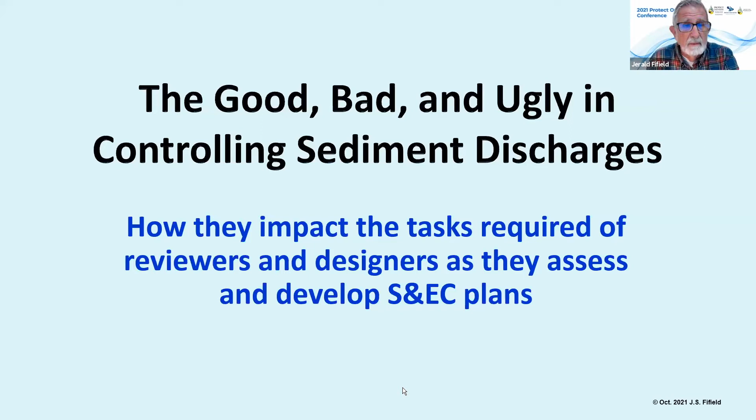The information I'm providing would benefit reviewers and designers of sediment erosion control plans the most, but the entire presentation will also benefit contractors as they implement what's necessary to meet the requirements of the federal construction general permit, as well as the Hawaii Health Department requirements. There are basic definitions we're going to be working with, and as we go through, you'll see an item come up on the lower left-hand part of your screen—it's a course that will be offered in February of next year for designers and reviewers.

The most important part right now is how do we minimize erosion? You cannot prevent erosion, and that's the first thing I want everybody to realize. But we can control or minimize sediment by minimizing erosion. Ironically, minimizing erosion during construction could very well be the least expensive part of this endeavor, because most of the time we are always trying to capture the sediment that's suspended in runoff waters, and that is what costs the most money.

As we go through, keep these three items in mind: sediment control, sedimentation—which is the process of capturing the particles suspended in water—and erosion control. Those are the big three we're going to be working with.

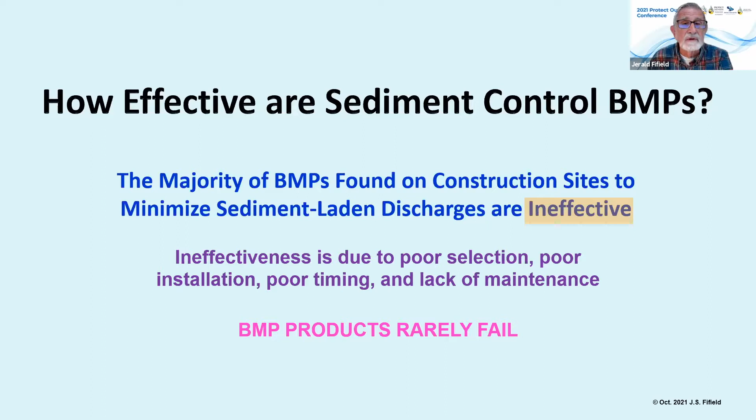One question I get asked all the time is, how effective are these sediment control BMPs? Well, not going to be good news. The majority of BMPs out there to minimize sediment-laden discharges are relatively ineffective. But it's not because of the product—it's usually due to poor selection, poor installation, poor timing, and probably the biggest one of them all, lack of maintenance. The products rarely fail. It's us that are putting them in, evaluating them, and doing inspections that have the problems. That's what this whole presentation is going to be about.

Let's go through a couple things commonly found in Hawaii. These are pictures I've acquired while doing work over in Hawaii. I'm going to give you a series of photographs, the name of them, and their intent. SC meaning sediment control, EC erosion control, WEC wind erosion control, and then there's the infamous none of the above.

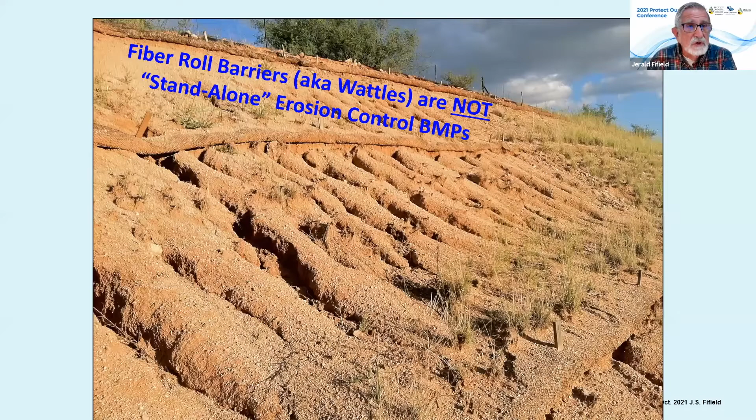If you keep something like this and runoff occurs, it's not going to be long before you start seeing pictures like this. Which brings up one word I want everybody to be aware of: fiber rolls or wattles. They are not, I repeat, they are not a standalone erosion control best management practice. Some people claim that it is, but they can only be used in conjunction with other BMPs to incorporate erosion control.

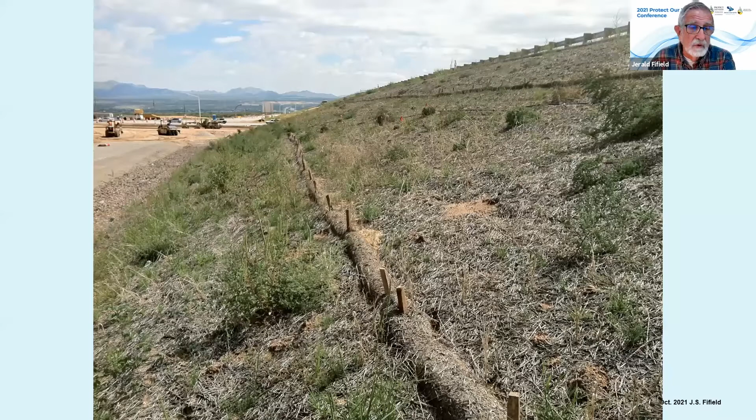So whenever somebody says, 'I've got an erosion control practice on the hillside,' I would have to say no, these are more sediment control. And what I'm seeing in that picture is a very ineffective technique. As a matter of fact, it would probably be better to put it into none of the above, because it's just show and tell, and that defeats the purpose of minimizing pollutants going into the Pacific Ocean around the Hawaiian Islands.

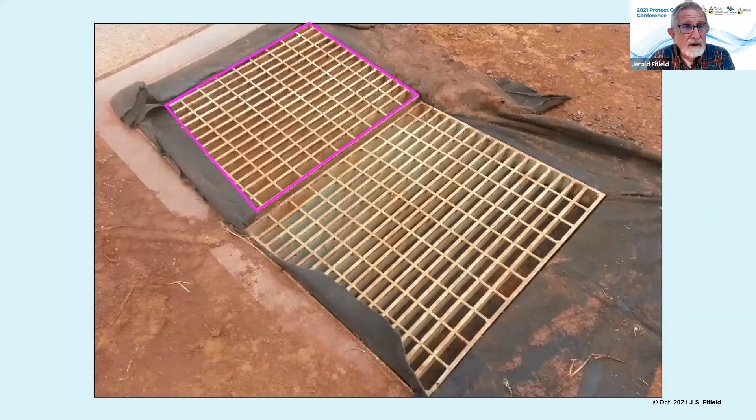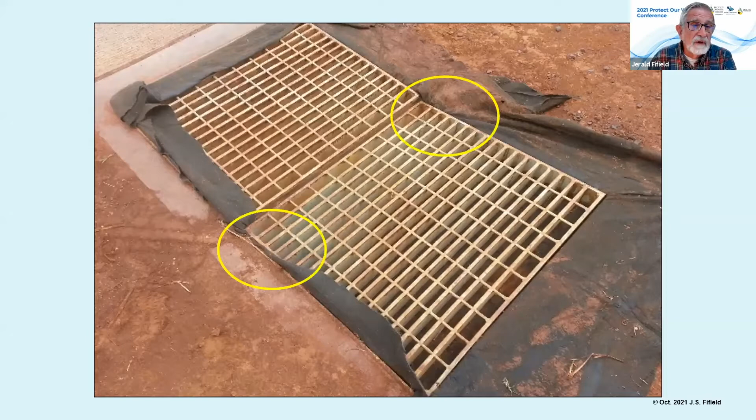But what is scary when I look at this picture is how clean the fabric material is, and that is due to one very good reason: the whole unit failed. I've seen these in Florida on projects we've worked on, and it seems like there's always one spot that looks cleaner than all the others. When that happened, it was a good indicator that water was coming very quickly and very fast to that inlet, in a manner that, if you trace the flow of water, it all comes and scours out any sediment that was supposed to be trapped by this fabric material.

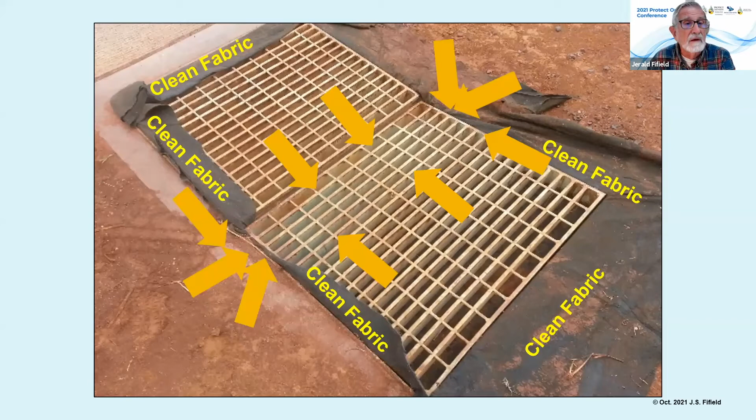The reason it fails is the fabric material clogs up, and that's the trouble with using fabric underneath a grate of any type. In our work in Florida, the contractor had a best management practice he called a rebar, because when they would be flooding out, he'd punch a hole in everything to make it drain. That obviously defeats the purpose. So this particular BMP, even though classified as a sediment control measure, is totally ineffective most of the time because the fabric clogs up.

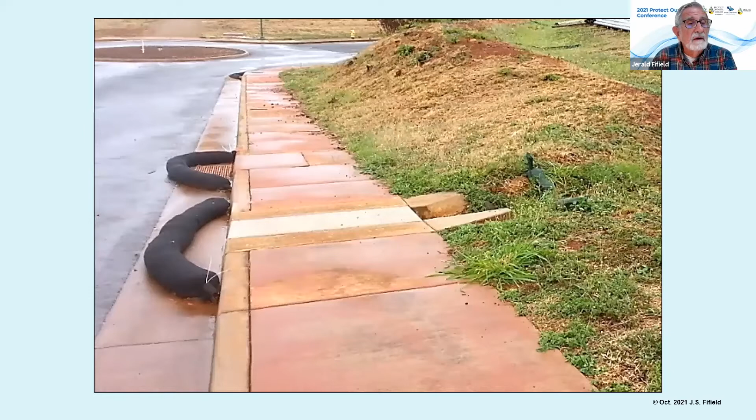Well, let's look a little at the fiber rolls or wattles that are supposedly placed around basins or drainage inlets. In this particular one we have a whole series of barriers, a whole series of fiber rolls. If you had any water coming off the construction site in this case, all that one fiber roll would do is get shoved out into the street. That is not where you want to place those.

Plus, you have to ask yourself: do the fiber rolls or wattles float? There are two types of wattles to be aware of: those made with lightweight materials and those made with heavyweight material. The lightweight materials will float, and if water makes those float, the units will allow lots of sediment-laden water to go into the inlets, defeating the whole purpose. If they don't float in a situation like this, it could just shove all that runoff water to a downstream location. So there's some good intended here, but the bad is that it's probably not going to be very functional. So that particular one is a sediment control, but I'd class it as an ineffective sediment control practice.

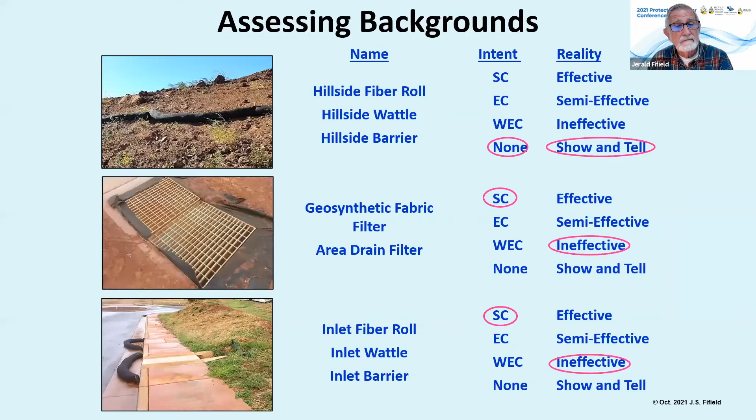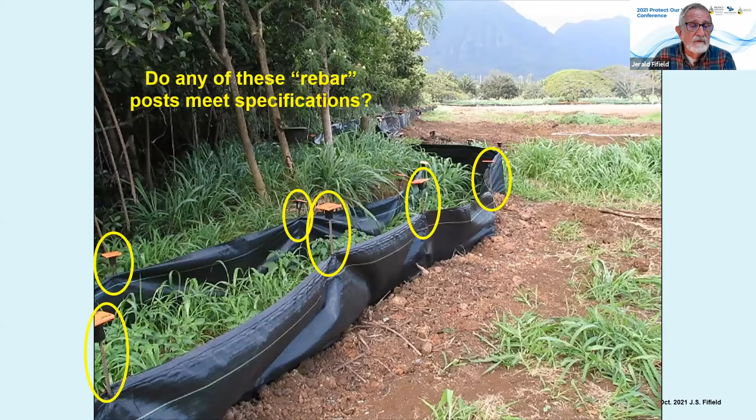Then I take a look at this and I say, why is all this soil piled up right next to the fabric material itself?

Silt fence material is supposed to be trenched into the ground. I have a strong feeling that this never got trenched into the ground, because if you look in the background there, in the distance, you'll see there's no dirt out there at all.

So this is just silly. We're simply trying to get by, trying to fake out somebody, when indeed you've got to put them in right if they're going to be effective.

I know there's no trenching on that second set of silt fence because there's no soil in here that shows it was ever trenched into the ground. The question comes up: why two sets of silt fence materials? That's really what I would classify very distinctly.

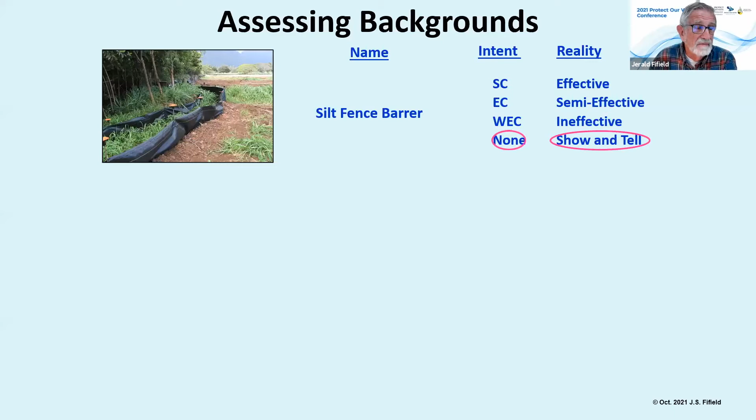Yes, it's a sediment control, but it is nothing but a show-and-tell product in here. Don't do it that way. All it does is cost a lot of money and it doesn't get you anywhere.

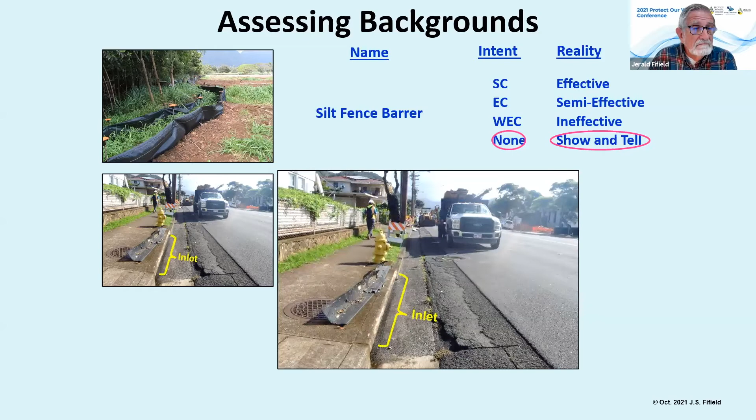Well, let's go take a look at a couple of projects that might be within the city. Now, in this particular case, there's my inlet and there's the BMP on top of the inlet. I don't think that's very effective. Even though it's classified as maybe a barrier or curb inlet barrier, you have to say it's a very ineffective product because it isn't doing anything.

Well, we can see in the background they're getting ready to do some work. Maybe they took it out early. As long as it doesn't rain, I guess it's okay. But we cause problems for ourselves.

And one of the best ways to knock down a lot of the problems we encounter is to get erosion control going. In this particular case, we've got erosion control, which is indirectly a sediment control product. But you might look at any erosion control product with vegetation as also being for wind erosion control.

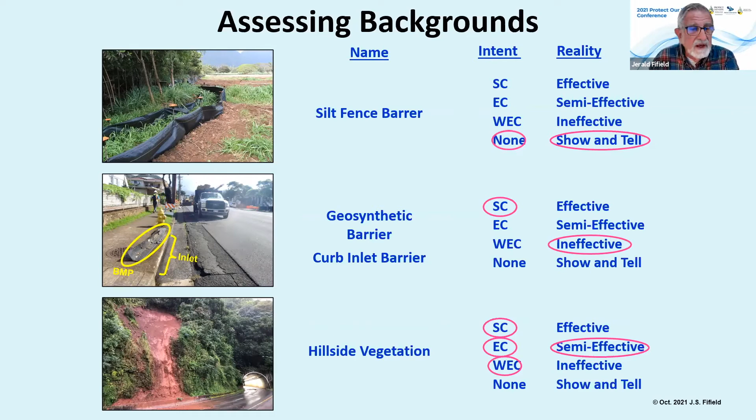Yes, this is probably better classified as semi-effective, only because it's such steep terrain in there, which you had to go through to put the road in in Hawaii. But it needs to be repaired, it needs to be fixed up, it needs to be taken care of and maintained whenever we have a situation like we see in that picture.

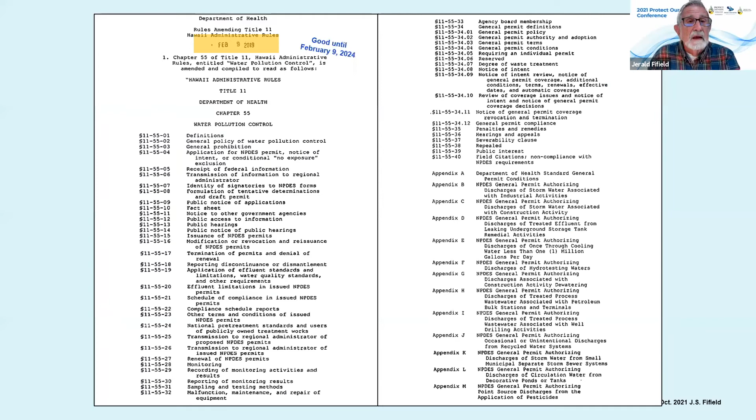Well, this brings up: what legislation are you living under? You're living under the Hawaii Administrative Rules 1155, which I think Claudia talked about. This is just a quick summary of all the things about 1155. It came into effect in 2019, and it's good until 2024.

Basically it's 474 pages of exciting reading, but it covers everything you need to know about what to do to try to minimize the discharge of pollutants from your construction sites, as well as many other types of scenarios that we're dealing with in here.

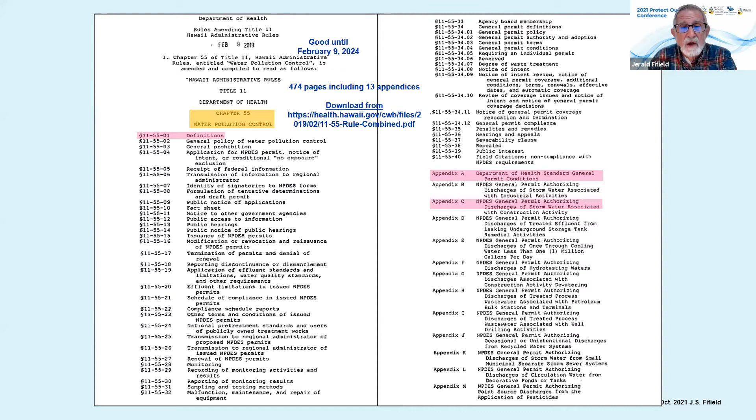I'm going to concentrate my topics here on the definitions and what I call Appendix C - what are the BMPs that we need to be dealing with when we're dealing with sediment control.

I start off with a very simple one, saying operators or owners - they're the ones that own the facility, which we would expect to be in there. But the big one is the permittee. Contractors, if you pull out a permit and it's issued in your name, you are classified as a permittee. With the DOT, they probably have a blanket one where they get their names being issued to the permittee at all times. Why is that important?

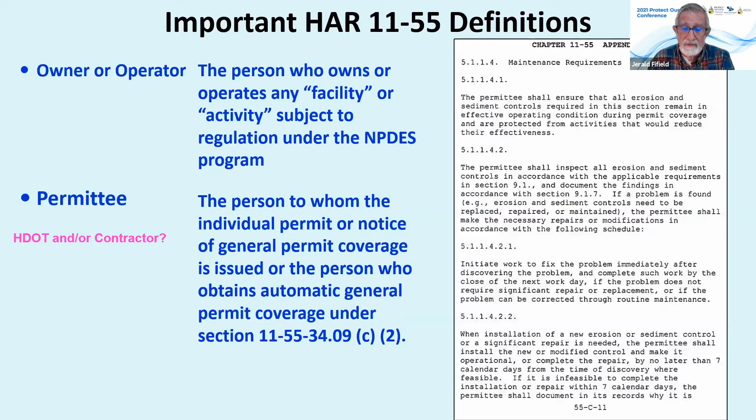It all bases upon one part of 1155 that you and everybody who is a permittee needs to be aware of: maintenance of the BMPs that are installed. It clearly says that you have to keep all of these measures going. If you as a contractor are representing the Hawaii Department of Transportation, you are the person responsible to make sure that all the BMPs are in a workable manner, and you ought to be doing the inspections as specified in the Stormwater Pollution Prevention Plan.

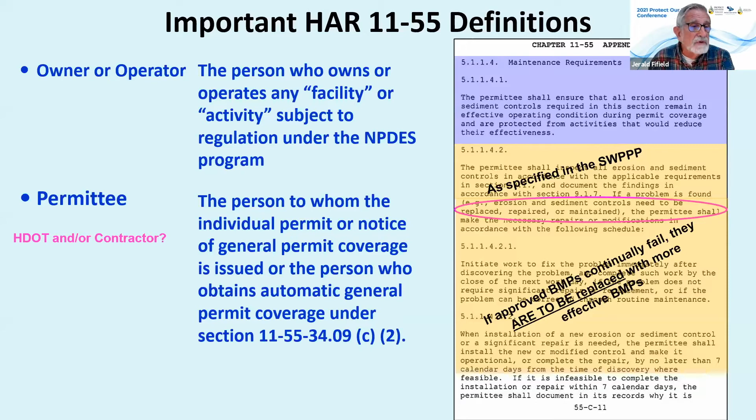And the other big one right here says, even though you have a BMP or series of BMPs that have been approved, if they are not functioning in a correct manner, you are obligated to replace them or get them fixed so that they will always work the best possible way they can. So in other words, just because you have an approved BMP, it may not be adequate for the job you're working on. It's a dynamic situation that we've always got to be keeping on top of.

So what BMPs are going to be taking care of these sediment-laden discharges? Ironically, there are just two. There are two BMPs.

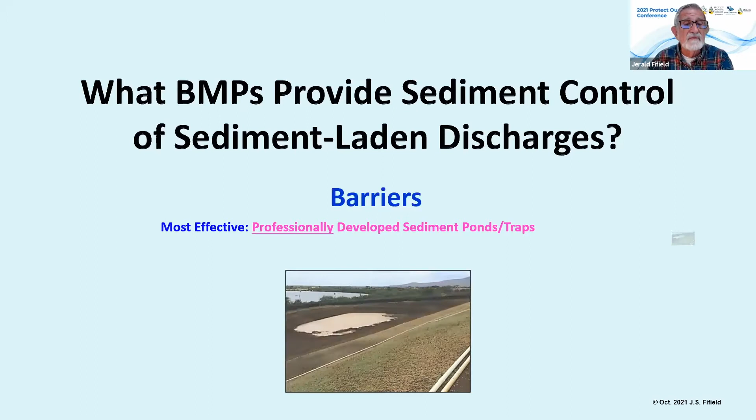One of those BMPs is barriers, and the most effective barrier is the one that results in the development of a sed pond. Trouble with the highway projects, you don't often have the room to be able to install an effective pond, but that is by far the most effective method. The least effective are the ones that you put in front of an inlet.

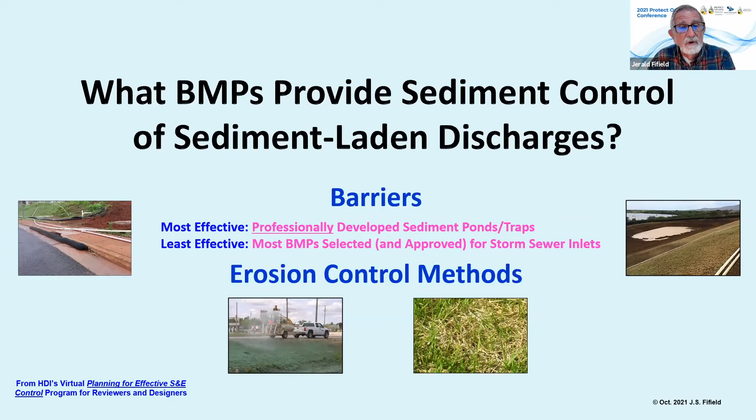So our problem that we've got to deal with here is which ones can be the most cost effective as a contractor to install and to be able to maintain. And as much as you possibly can, think about erosion control. That's the one that is going to be the most effective for you. But unfortunately, too many times we end up trying to remove the sediments that are already suspended in runoff waters.

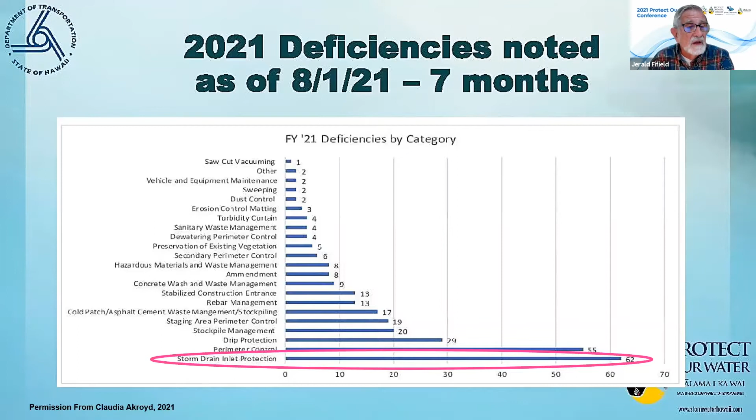Claudia presented the fact that storm drain inlet protection is the biggest one that's causing problems for everybody. And that's 62 observations, but maybe there were 5 inlets within each one of those sites, and you have 62 observations, that's 300 violations, non-compliant situations that come back and nip the permittee right where you don't want to be nipped.

The effectiveness of inlet protection. This is what you're looking for. You're looking for sediment that is on the upstream side of the barrier. In Colorado, we call these rock burritos, but that's what you're aiming toward. The trouble is, it's very difficult to do this with many of the techniques that we have at our fingertips.

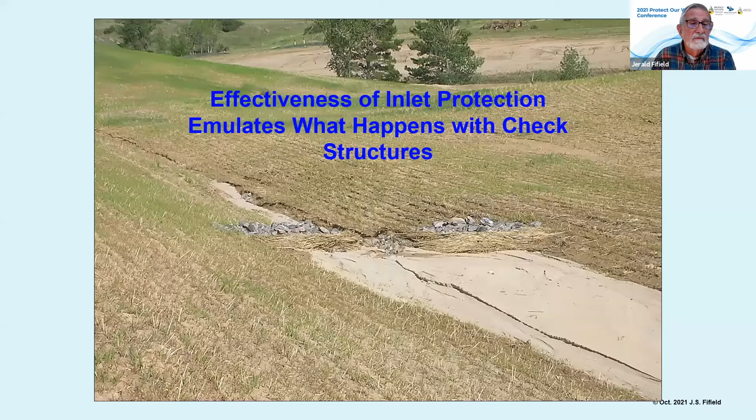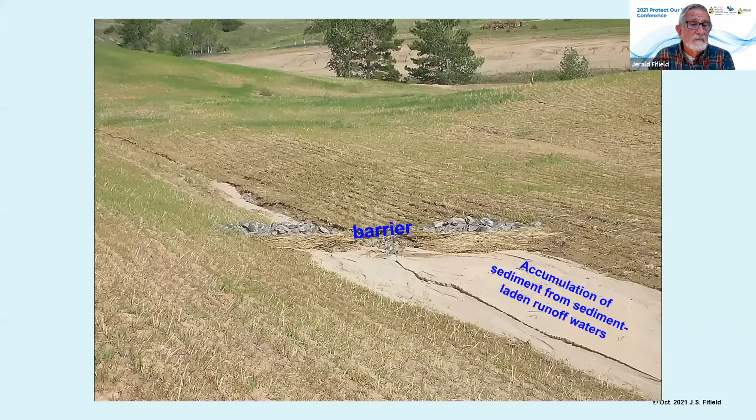The effectiveness of these particular barriers that we're looking for in a check structure is exactly the same type of thing that needs to be done for reducing the sediment going into the inlets of a storm sewer system. The trouble with this is that, yes, we have a barrier. Yes, we have accumulation of sediment, but if you're in a drainage swale, you've also got downstream erosion occurring there. Well, those are problems associated with any construction site that maybe can be taken care of by additional barriers. Well, yes and no.

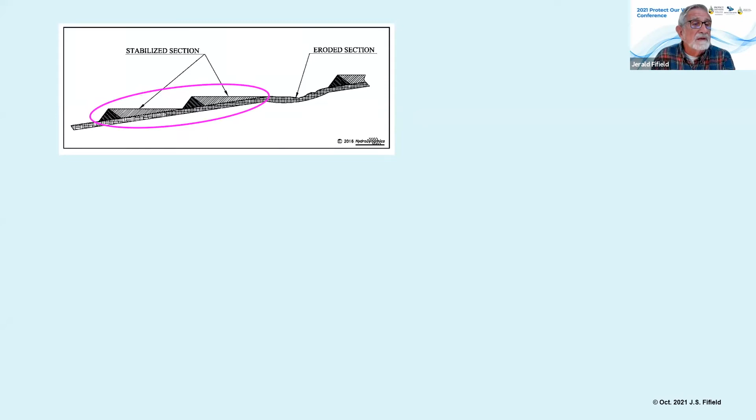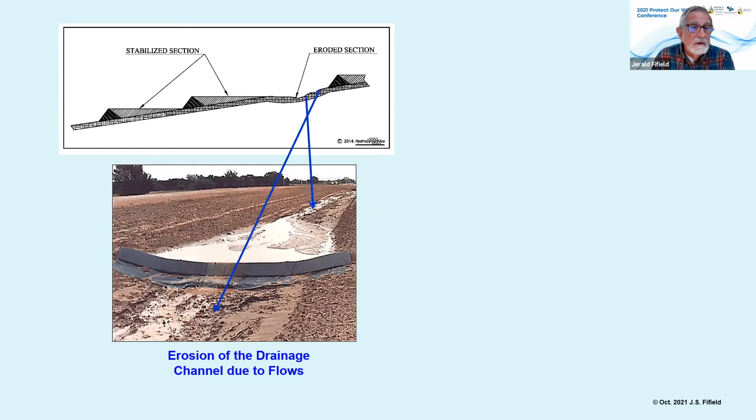Here's an idealized version of what could be done where you have these stabilized sections close to each other, but let's face it, most of the time on drainage swales, we just put in one barrier and hope that we got it at a location that's going to capture enough sediment. Well, take a look at it. There are two sections that are eroding here, but there's one big section that captures runoff water. And this is illustrating to everybody that if we capture runoff waters, we're going to be capturing sediment.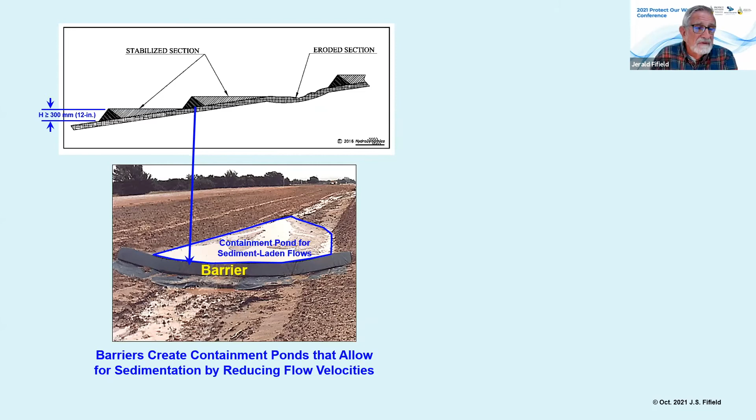Because what happens is that there's a pond being developed that reduces the flow of water down a drainage swale. And whenever you're doing this, don't just put in a very short or shallow barrier, put in one at least 12 inches, preferably even 15 inches, because they need to have enough containment volume behind them to make a meaningful capture of runoff waters flowing down any drainage swales.

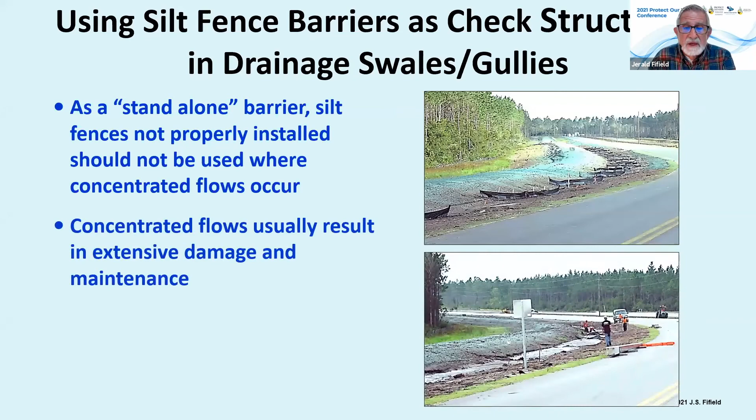And I put this in here on purpose. Do not use silt fence barriers in drainage channels. They do not work. Matter of fact, you can be spending more time doing cleanup than you will ever get in benefit of capturing any sediment. Don't use them and don't design them to be in drainage channels. They do not work because they're not meant for concentrated flows.

Well, that does beg the question. Can silt fence barriers be designed to use on drainage swales? Yes, if you're careful.

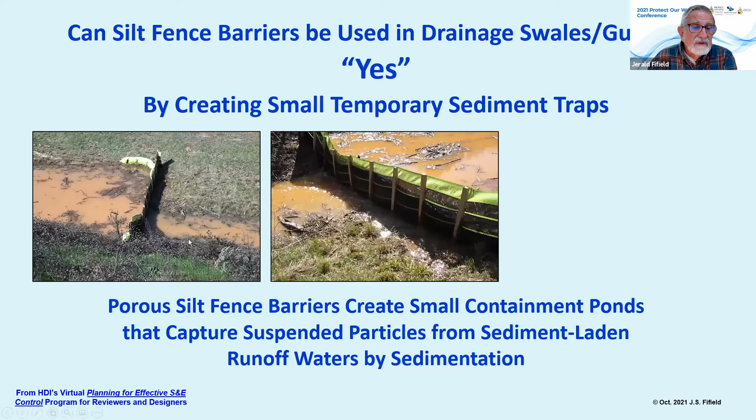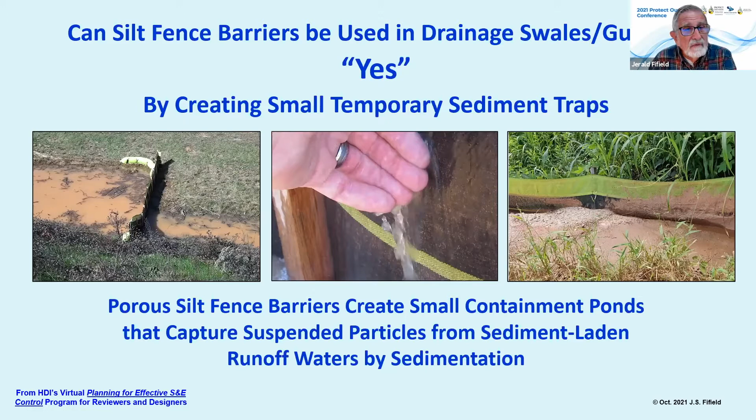For example, if you were to do something like this in a drainage swale where you could capture water and fix it so that it comes and is piled up right next to a porous silt fence barrier where water goes through that barrier, then you're going to capture some big particles upstream of that. But that takes a lot of good design and good review of the product itself and how you're using it. So you've got to be real careful with it and you've got to be creative.

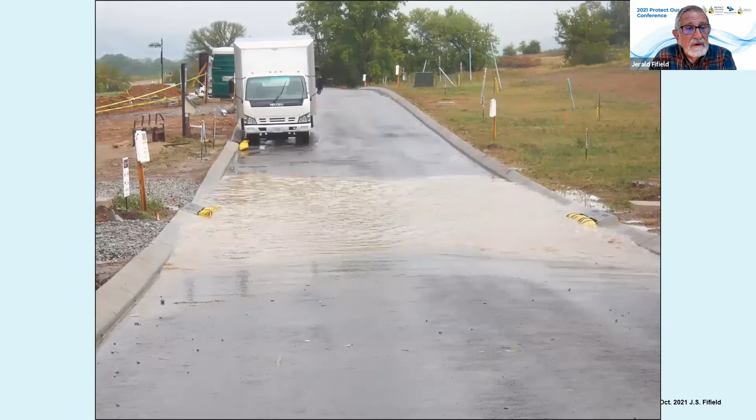You are living underneath this installation requirement that says inlet protection measures that'll remove sediment from the discharges. And today, the norm appears to be putting a barrier in front of every inlet opening. And of course, guess what? We get flooding. Now, is it wise to put a barrier in front of all inlets? Good question. And ask the question right now: how do inlet barriers remove sediment?

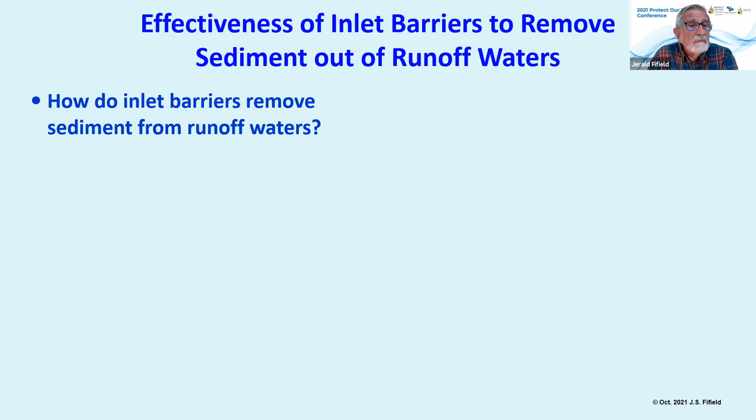Actually, they don't. They put up the conditions that allow for the sedimentation of contained runoff waters. For example, take a look at this barrier installed on an inlet in a subdivision. If you look right above the barrier itself, you'll see some water's been ponded up in there. And that in turn is doing one thing with the barrier, that is, it's simply shoving the water downstream.

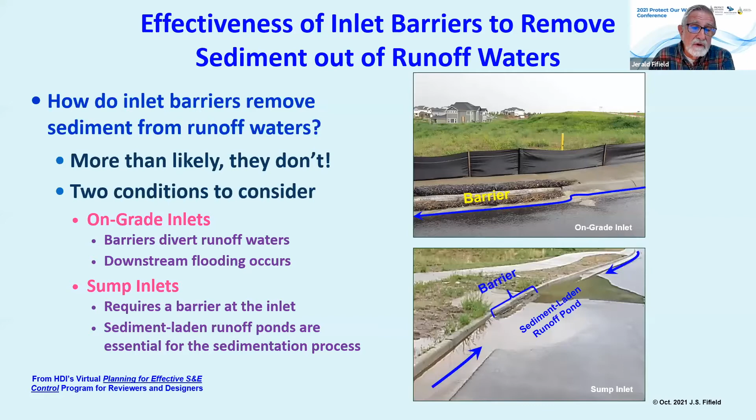Compare that picture you see up there to one where you have sump inlets and you have a barrier, but water comes in from both sides and it creates a pond. It is the pond that is doing the work for reducing the sediment-laden particles that are in runoff waters. And that's what you're looking for, the development of a pond, which doesn't always go well for developing roadways, does it? So we have to think a little bit differently about this. And this again is the part for reviewers and designers.

Think about what's going to happen if you were to have a situation that looks a little bit like this, and say an Environmental Protection Agency representative came out and did an inspection. That individual comes out there and says, oh, good, you've got a 6-inch high impervious barrier. You have it around the project where you're working, and also you've got it in front of an inlet. And you're saying, well, I captured some sediment. That sounds good. But you also have erosion.

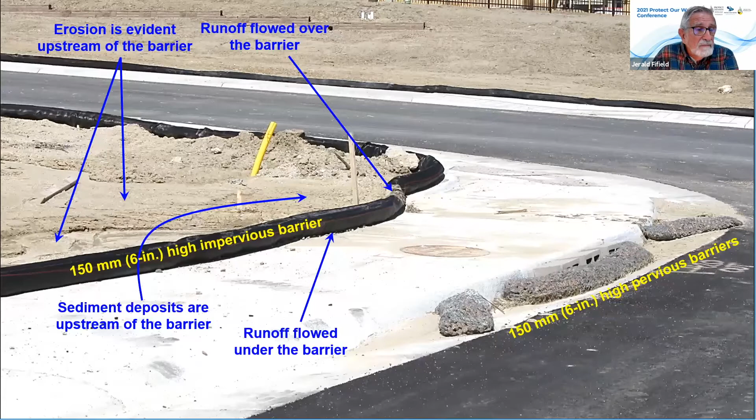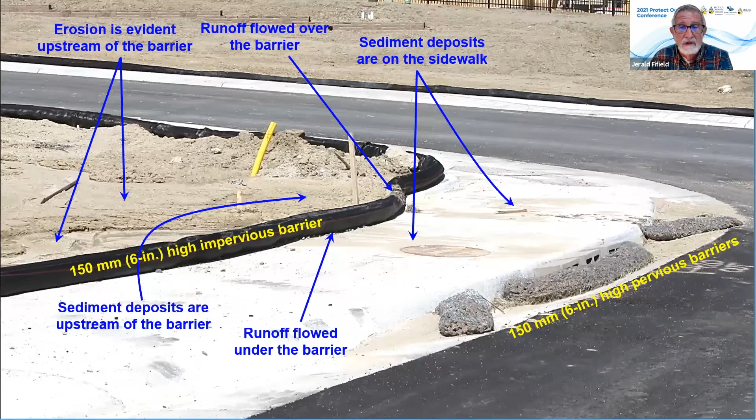And anybody who does any inspections, hopefully you're seeing stuff like this and asking the question, why are we getting erosion? And we look at this and say, well, water flowed over the barrier. But if you look at it long enough, you're going to find out water flowed under the barrier. So is that barrier really a good barrier to use there? You might find a situation where we're getting sediment deposited on the sidewalks and in the gutters, but you're also getting it on the pavement. So you're asking, what happened here?

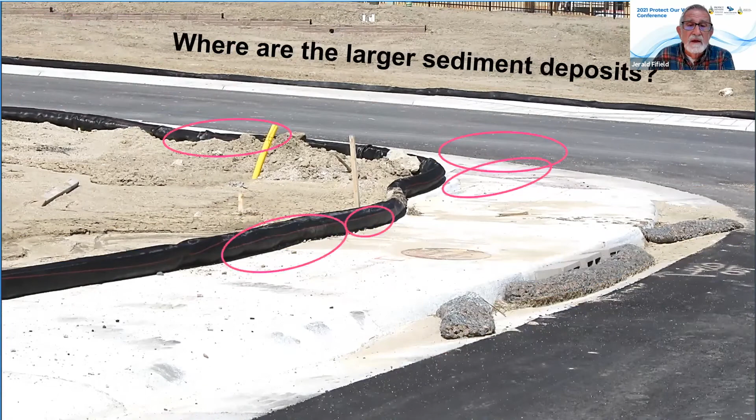Well, assume that a bunch of water came, like it's been illustrated, off our site that's under construction, down the gutters of the subdivision or the roadway that's under construction. And you start saying, okay, that's a lot of water. Why isn't this barrier doing the job it's supposed to? Well, as that water recedes a little bit, before long you start finding out that, hey, it captured a little bit of sediment. But boy, we didn't get any sediment in the front of this barrier.

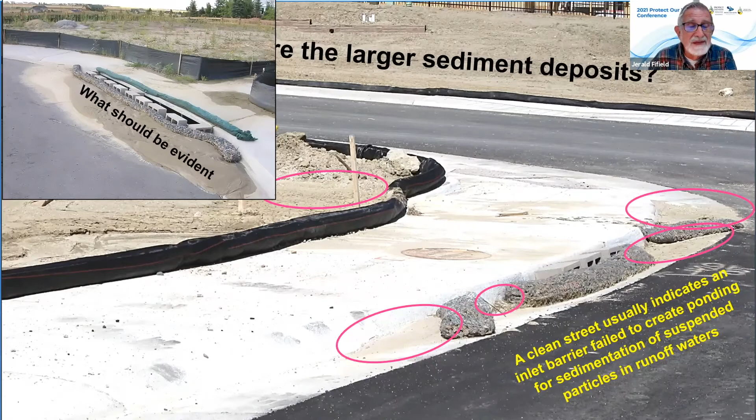And by the way, notice how clean that pavement is there compared to some of the sediment that rolled off earlier. Well, when you end up having a clean pavement in front of an inlet, that told you that that barrier did not work. It was totally inadequate. A clean pavement site in front of a barrier is an indication that the barrier was ineffective. And those are the types of things that Claudia was pointing out to you in her presentation, because you should be seeing the collection of sediment in front of the barrier every time.

Well, where did most of the sediment go? Right into the barrier. If it flowed underneath the impervious barrier over here, the black one, it went underneath it and went right into the inlet. Totally defeated the purpose of the barrier. The other ones rolled over the top and it was shoved downstream.

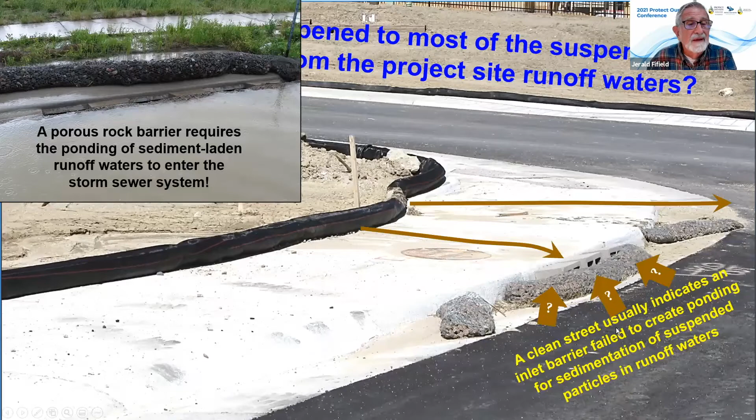Well, is it possible that some of the water went into this inlet due to ponding? Well, ponding indicates that we should have had the deposition of sediment. We don't have any deposition of sediment, so we can be pretty well assured that it did not collect any sediment from runoff. So all of this was predominantly sent off and diverted downstream. And you could end up with a situation that looks like this, where a lot of sediment is down at one area that's in a sump. And that is not a good thing to have happening.

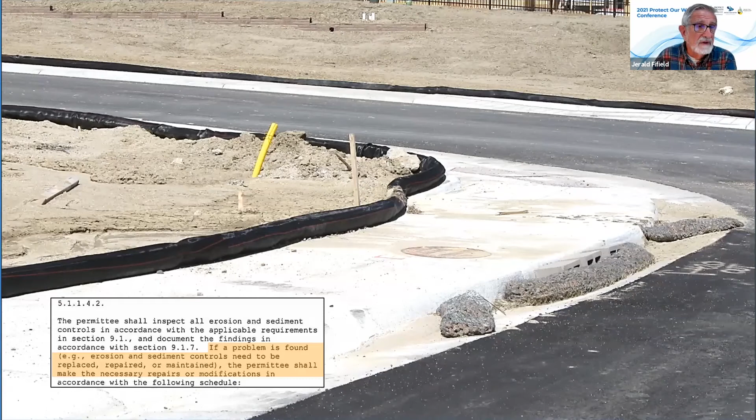Because remember, one of the things 5.1.1.4.2 says is that you're supposed to keep those things in workable condition. And if they're not capturing sediment, they're not working, that means that you've got to replace things in here. In reality, this could very well be a non-compliant sediment control barrier, because if it continually had erosion going underneath it and didn't capture much sediment, somebody could write you up for a non-compliant situation.

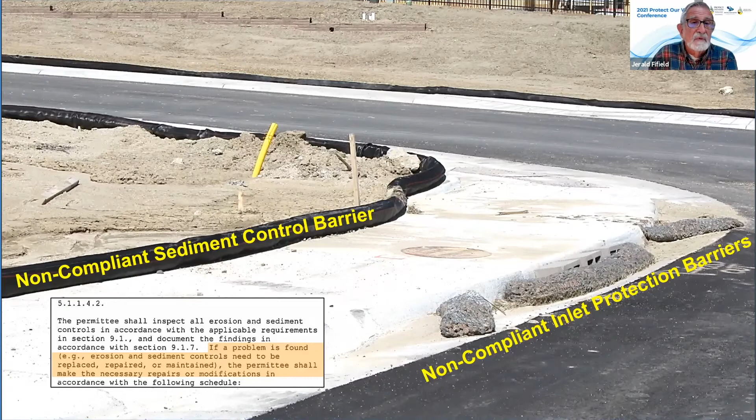This rock barrier that we have in here, that's a good illustration of a non-compliant situation. And that is not what you're trying to do. You want to just make these compliant. But there's one big one that's facing everybody, because we put barriers in front of inlets and around construction sites. But we tend to forget that every 14 days and no more than 14 days, you're supposed to stabilize hillsides. That's an EPA requirement. That's the health department requirement.

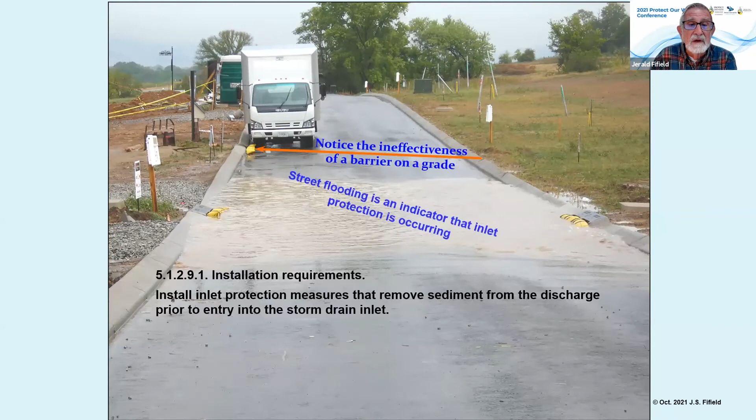So we have basically a situation here that is predominantly a non-compliant situation if we don't get in there and clean it up and do the maintenance in a timely manner. And those are the key words that come in there. So it's ironic, you may have flooding that exists right into the situation, but that's a pretty good sign that the barriers are causing protection and getting sediment to be deposited.

Now you have that criteria that's down below, and if you look at it, and this one also is available to us, it says that you can remove these things. But keep in mind that removal of the barriers should be only where safety or loss of property is of concern. Don't just remove the barriers because there's some flooding occurring there.

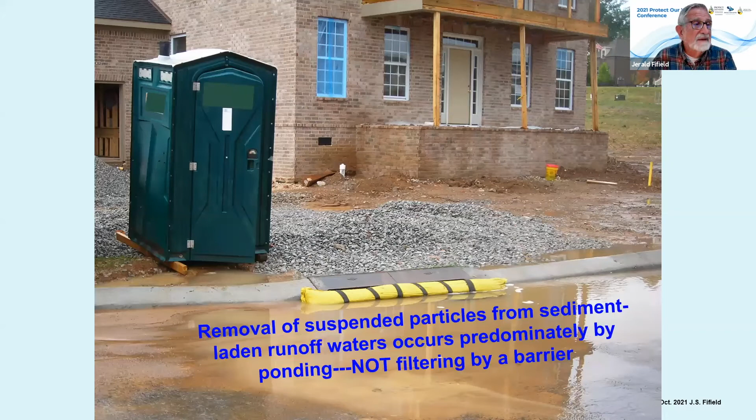Well, all of this is saying one major thing. If you're going to use any types of barriers in front of a storm sewer system, you've got to have flooding. Isn't that a terrible thing to think about? But if you don't have flooding, you don't have a good BMP that's worked there for you. Which says, aren't there other things that we can apply in here? What is it that we have with something that looks like a sump condition for sedimentation?

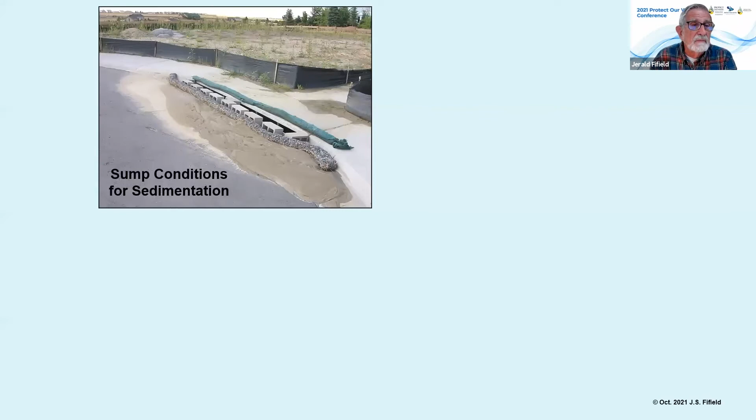And we take a look at it and say, okay, that looks like it's doing a job, but if you were to work the numbers, if a lot of sediment-laden waters were coming to that barrier, that's a very, very small amount of sediment that's captured, because a lot of the water and sediment itself went over the top of that barrier. So reviewers, designers, when you're putting stuff in there, be careful with these shallow barriers. Be careful with these barriers that indeed are in front of your inlets.

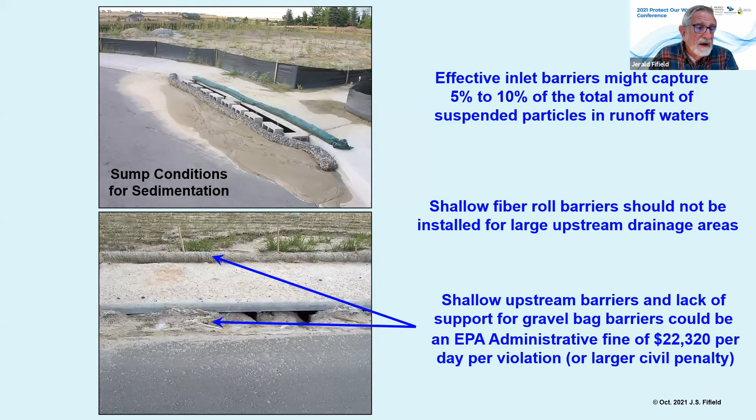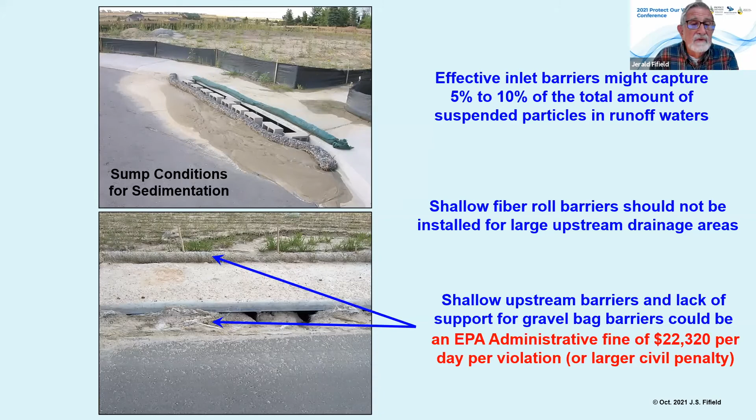If they don't have the right support, they don't have enough volume behind them, you're going to be in a non-compliant situation that EPA, if they really wanted to, could charge you this much per day per violation. That's what's current for 2021. That value, by the way, will increase on January 15th of 2022. That's by criteria, by law, by Congress. So there are a lot of things that we've got to be concerned with in here.

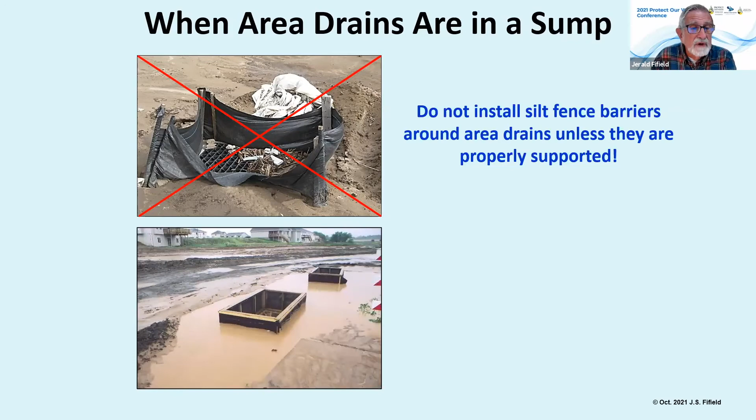Now, let's take a look at area drains that so often appear on plans. Contractors, if you see any type of illustration like this, the first thing you ought to do is throw it away, because it's not supposed to be there for concentrated flows. If you're going to use concentrated flows, you're going to have to shore them up. You're going to have to put bracing in there, because that's the only way these are going to function. They've got to have the support.

And if you don't want to put in the support, you might want to consider rock or some type of T-post or something in there that can capture the sediment, or go to commercial units. These commercial units can capture a tremendous amount of sediment. But every one of these is so much a site-driven condition. Not every highway has all the extra space to put in something that you see in the lower left-hand corner here. So it's just one of these things that we've got to be careful of.

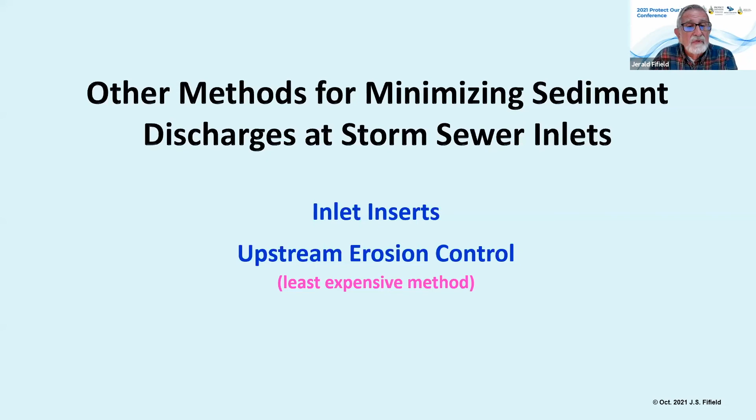So what are other methods? Other methods, one of them is inlet inserts, the other one's erosion control. And believe it or not, erosion control can be the least expensive of all your methods. So we'll just show you what we're looking at on here. Inlet inserts, just a bag going right into the inlet itself. They come in different shapes, come in different forms.

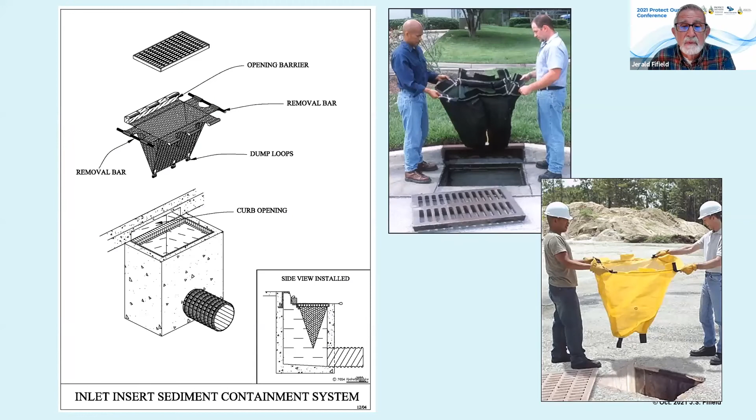Claudia talked about it in her presentation. And there are different types for different situations that you're dealing with. And boy, do they capture sediment. But they do not prevent sediment from going in there. They can only capture a small amount of the total sediment if you have a project that has a lot of sediment, suspended particles, or sediment-laden runoff waters.

Witch's hats is one that's going in there, but compare the volume of that one to the yellow one you see in here. Usually the witch's hats are in areas that are more urbanized conditions versus where there's a lot of construction going on. But they should not be used as saying, hey, this is the only method we're going to use for sediment control.

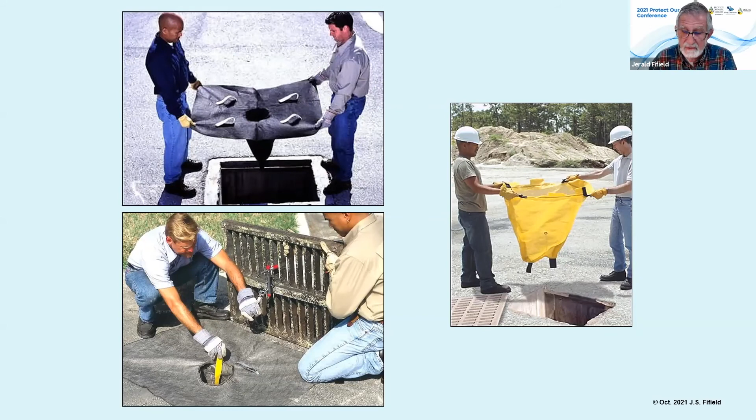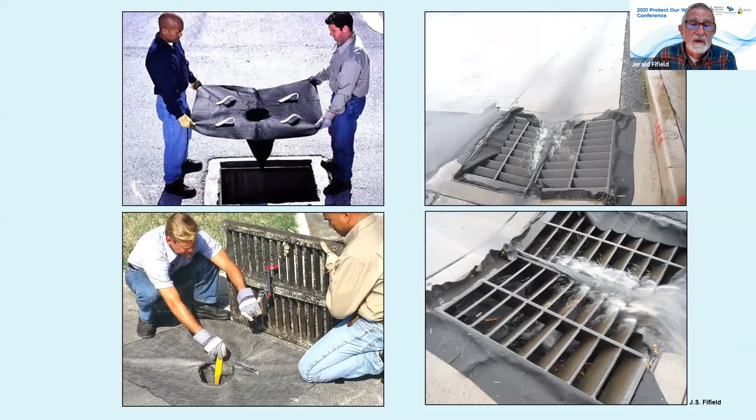Claudia pointed out, and thank you, Claudia, for the use of these photographs. Water goes into the inlet, but there's a little ironic thing in here. 1155 says install inlet protective measures that remove sediment from the discharge, but look at the bottom of that sentence, prior to entry into the storm drain inlet. In other words, and this criteria came from EPA, they're almost tying our hands up in here.

If you have sediment laden waters and they go into an inlet, you got one of the better methods. And let's just hope that regulatory agencies don't try to ding us here a little bit, because inlet inserts are very effective. And I encourage everybody to think about using them as much as you possibly can.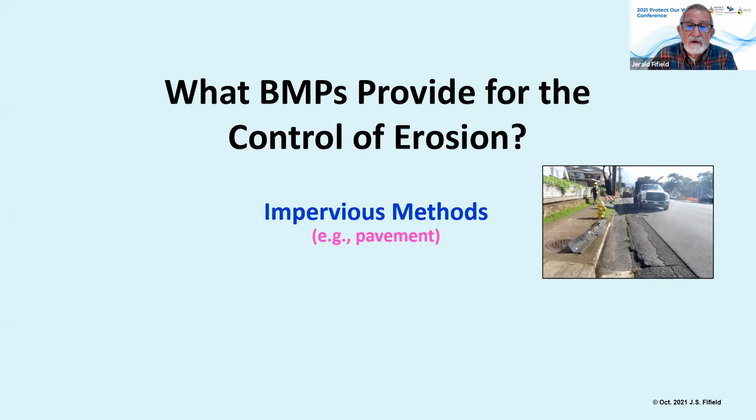Well, now, what about the erosion control? What BMPs are necessary for the erosion control? Well, one of them we talked about already. It's impervious, and the impervious part is fine. They have diversion structures, temporary soil coverage, and vegetation, but all of it's going to be dependent upon your project, how big it is, how little it is.

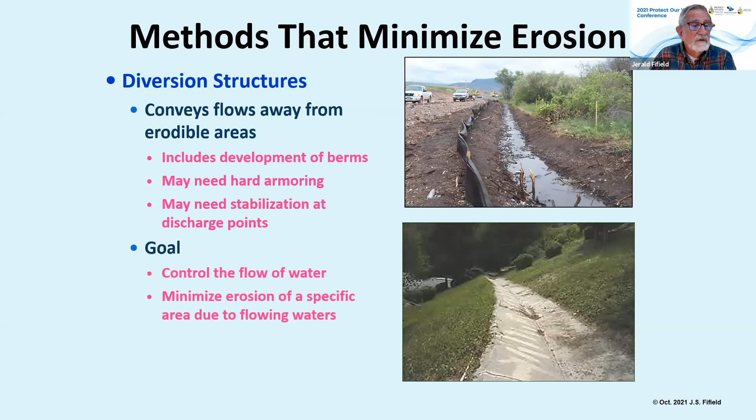Diversion structures are a great thing to be considering when you're diverting the water away from an area that's been under construction. What it does is you have a controlled discharge in a controlled channel, so you want to make sure that the water's not going to impact the embankment being built or whatever the case may be, or we're removing waters coming off a hillside. And you may even have to use highly impervious like concrete as a way to get the water away from your area that you're concerned with.

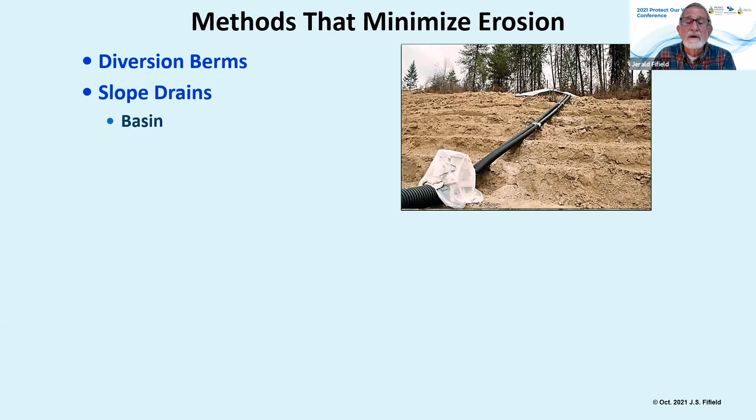Or you can use slope drains. Slope drains themselves are a terrific way of conveying water that keeps coming on your projects when you don't want it. We're going to just simply divert it down the slope away from the project site itself. And they're great for highway work. My hat's off and thanks to Barry Fagan for providing this for Alabama, showing that the use of slope drains can be very effective. And if you notice there, the establishment of vegetation goes right along with it.

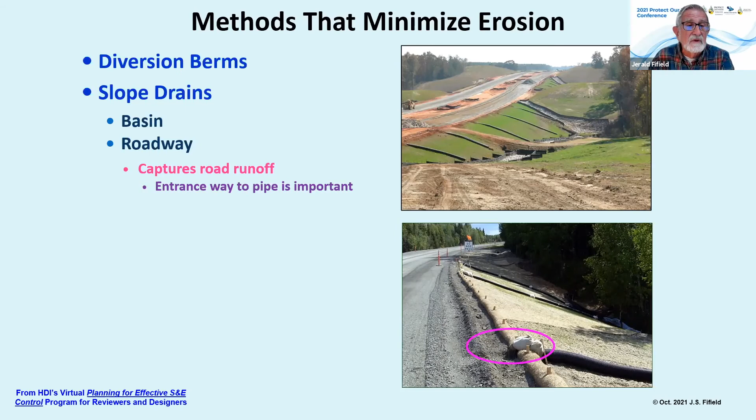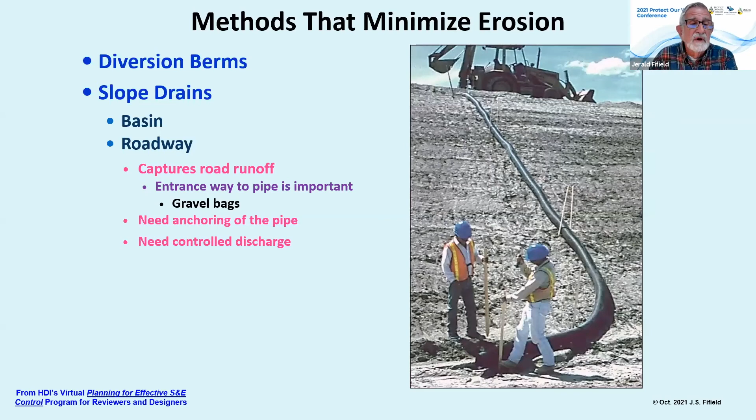The only problem that I have with roadway slope drains is the entry to it right in here. Often that's just a little too small. Sometimes you need to end up having something a little more robust that can capture a lot more flows, because you don't want to blow out the embankment that the slope drain is being held in. Got to do a bunch of staking. I would not use these shallow, long ones, like they're survey stakes. Much more robustness needs to be done on there, but they are good. They work.

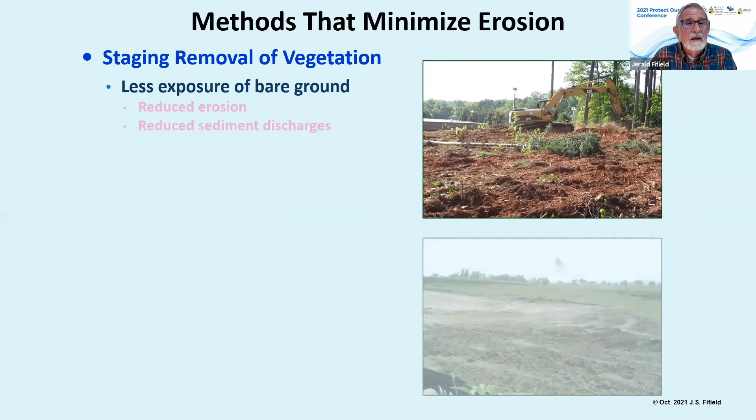But the other one is contractors. If you got to remove vegetation, don't need to remove it all. Stage the removal of that vegetation, because less soil being exposed means less erosion. Less erosion means less sediment discharges. And always keep your topsoil around. There are different methods for planting seeds. You probably don't use this in Hawaii. It's the drill or broadcast. The trouble with broadcasting the seed is that it's good for the rodents and birds, and they'll wipe them out.

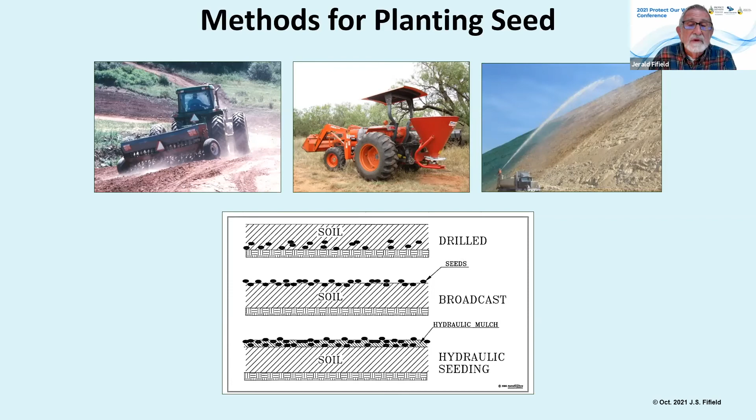I believe, if I'm not mistaken, that hydraulic seeding is very predominantly used in Hawaii. We have found in areas with arid climates, and the islands do have sections that are arid, that you can do a two-step process where the seeds are put on first, followed by a hydromulch. So there's different ways of doing it. Just make sure you get everything you possibly can into your tool bag to try to make sure you're controlling erosion as much as possible.

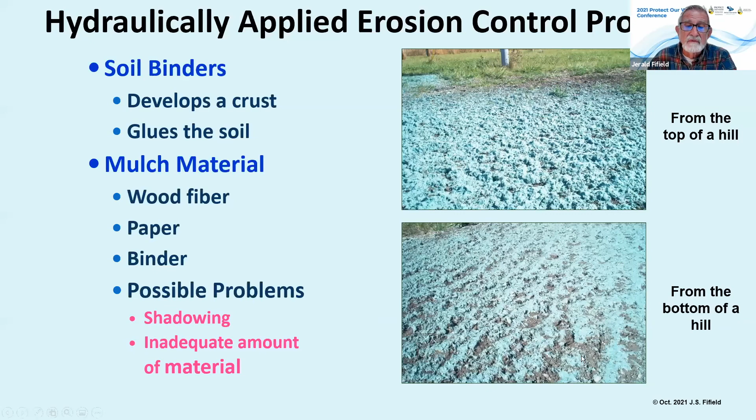They both work well, but there's a possibility that you could have some problems where, if you look at it from the top of the hill or the bottom of the hill, you'll see some shadowing occurring where you end up having an awful lot of bare soil being exposed.

Use erosion control blankets, very useful, very handy. Big question is, do you need fiber rolls on the blankets? Maybe in Hawaii you may need them because they're there to intercept the flows that come on the surface, but they're often not needed in areas where you don't have heavy precipitation. So you might have to take a good look at it.

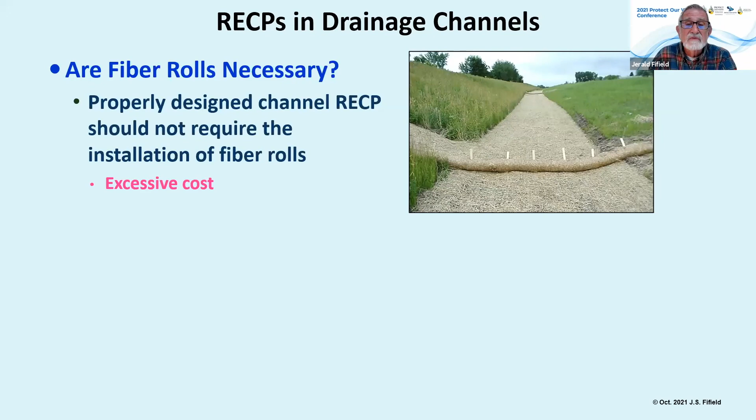Same thing with RECPs in drainage channels. You may not need fiber rolls in drainage channels because they can be an excess cost, but they can be used and there's nothing wrong with them. Just put them in correctly so they do some benefit to reduce the sediment that can be carried by the runoff flows that go onto your project site.

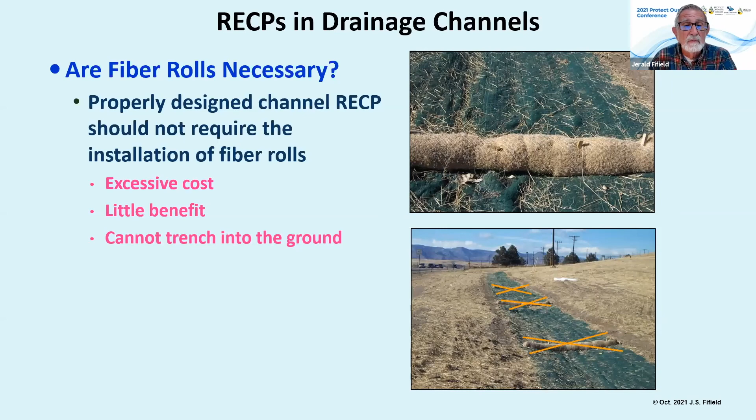So that's a very quick little summary we can put in here. There's so many different products out there to use, but we've got to keep in mind we can't stop the sediment, but we can sure minimize it. We've got to fully understand that the minimization itself is going to have some good, some bad, and some ugly. So we've got to do a lot of good planning and make sure we implement things in a more robust and accountable manner so that we keep the sediment being discharged off our project to a minimum.